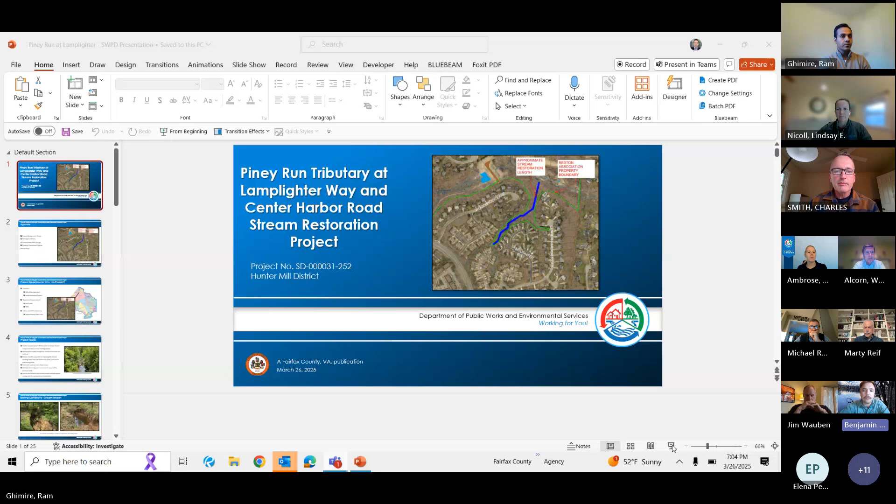Yeah, sure. Hey there, see a lot of familiar faces here from the neighborhood, but for anyone who doesn't know, I'm Ben Rhodes, I'm the watershed manager with Reston Association, and have been trying to help liaise between this project, Fairfax County, and our members here, to make sure Reston Association's interests are met by this project. This stretch of stream was brought to the county by Reston Association years back due to the severe erosion issue and exposed sewer lines.

So appreciate Fairfax County leading here on Reston Association property to do this project. And I'm Mike Reynolds, and I work and support Ben, and we just really want to support all of our residents here in Reston as well as this project. So thank you for having us, Charles.

Yeah, and it's just a quick note that clearly Reston is our close partner. It's on Reston Association property by and large, and we will work very closely with Reston to coordinate impacts to the community, as well as Supervisor Alcorn and his staff. Mark Goldberg-Foss is on tonight from Supervisor Alcorn's staff, who will also be our close contact throughout the process.

And then the other folks I'll introduce and let Ram take over. Heather Ambrose is with us this evening, she's a branch chief in the Stormwater Planning Division. And Lindsay Nicoll, who is the lead engineer for this project, designing for McCormick Taylor. So with that, let me turn it over to Ram Ghimire, who is our project manager.

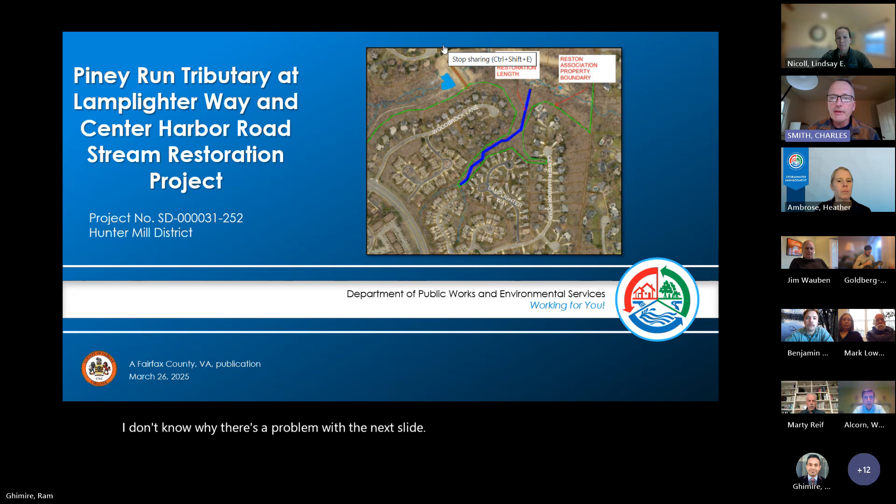Is there any problem? I don't know why there's a problem with the next one. Ram, if you want, I can take over and run it from a PDF. That might be easier, let me give that a shot. All right, I'll do that. Yep, please, I don't know. All right, can everybody see this?

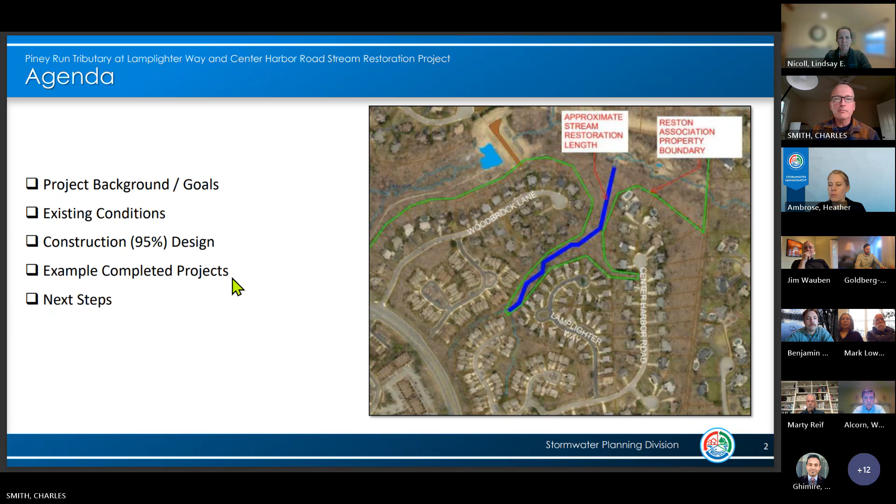All right, let's go, this is slide 2. Okay, thank you, Charles. For the meeting agenda today, we will touch on project background and goals, the existing conditions of the project. We've currently completed the 95% design construction documents and we're heading to final design. We'll show some examples of completed projects and the next steps for the Piney Run Tributary.

Okay, next one. As I mentioned earlier, the location of the project will be in the Difficult Run watershed, and it will be on the Reston Association property. For the regulatory requirements, we have the MS4 permit and TMDL requirements we have to meet, and the project has safety and utility concerns because of sanitary sewer line exposure in 2 locations. So the project is really important, that's why we were brought in and have been discussing this in the past.

We can see the project location here. The green line is the Reston Association property boundary, and the blue line here is the project scope that we're working on.

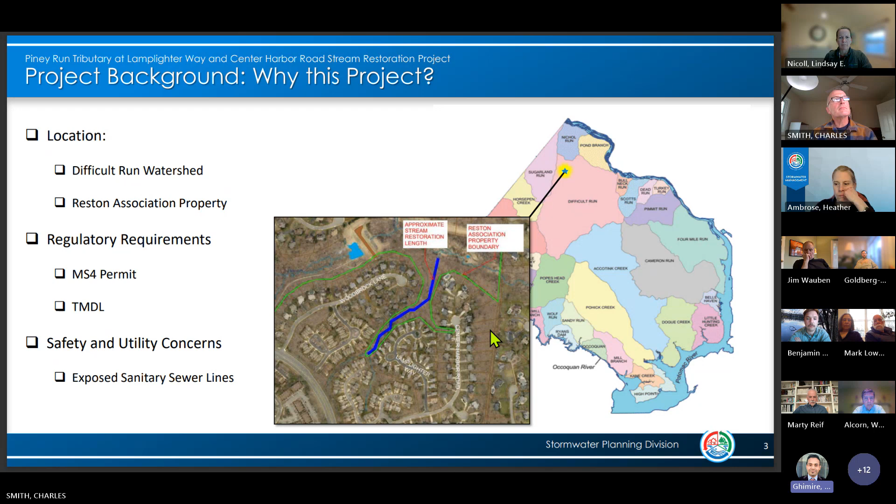The project goals: the project will restabilize approximately 1,500 linear feet of stream channel, preventing future erosion and degradation of the channel. It will improve water quality through the removal of nutrients like phosphorus and nitrogen, and a lot of sediment through the stream.

Restore a healthy ecosystem by improving the channel. We'll be installing native trees and herbaceous plants, and we'll be doing invasive plant management as part of the scope of the project.

To protect the sanitary sewer infrastructure, to protect the county assets and infrastructures, the exposed sanitary lines, and to minimize community and environmental impact of the proposed work. We're trying our best to save trees and protect environmental factors, especially sediments and erosion and degradation of the area, so that will help in the long term. We'll be trying our best to minimize the community and environmental impacts of the project as far as possible.

And we'll continue to maintain open communication with the community members during the design as well as during construction of the project.

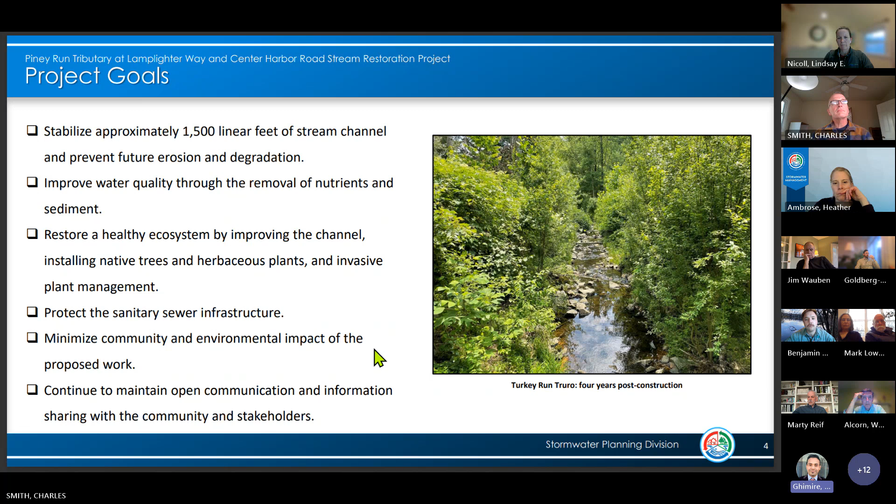Existing conditions of the stream at Piney Run. The banks are susceptible to continued degradation and failing slopes. We can see 4 or 5 foot deep channels and a lot of fallen trees in the area.

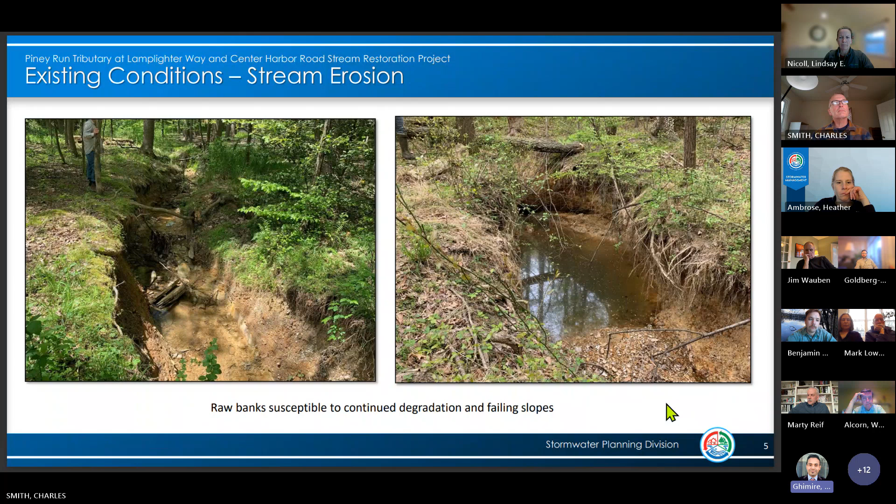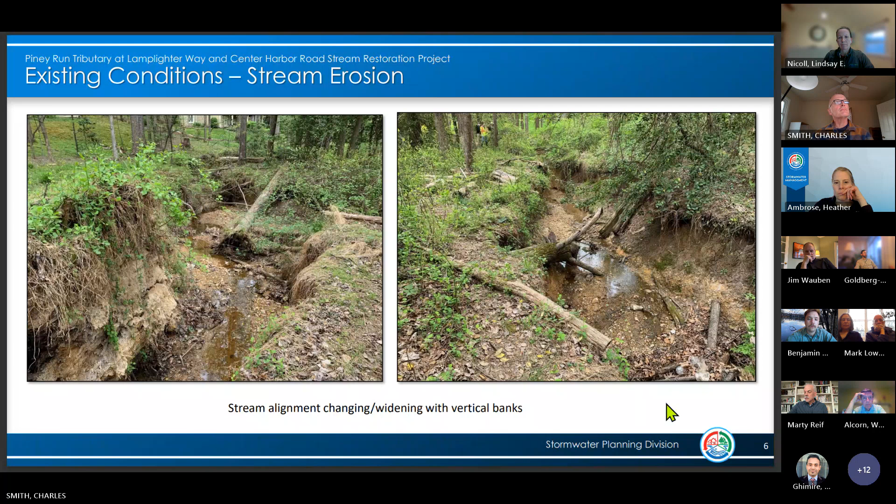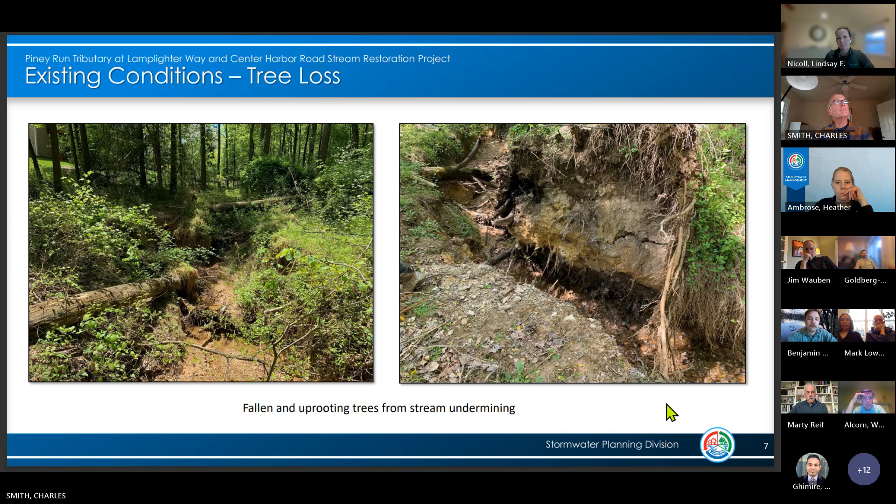Similar conditions here - a lot of stream alignment has been changing from here to there. Widening of the channels and vertical banks can be seen currently on the project site. A lot of fallen and uprooted trees from stream undermining, and we can see a lot of tree loss here.

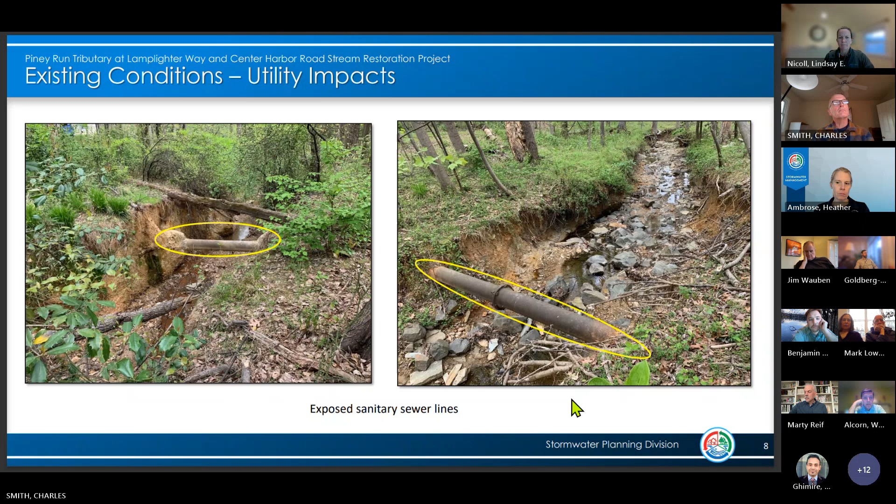Overall, just touching base on the history, how we designed it, and the current status.

We completed pre-design assessments and survey, and developed the concept plan at 35%, which was shared with all community members and stakeholders. Then we went into easement acquisition of the project. Then we reviewed the preliminary 65% design plan. The current plan, after the 95% design, is pretty much close to 65%. A lot of changes were adapted from 35% to 65%, but pretty similar from 65% to 95%.

So we are in the final design phase here, working on permitting and utility coordination. And this is the overall plan for the project.

This is the construction entrance to the Pink Trail. We have a small staging area here, and we'll use the access road through the Pink Trail. We're trying to minimize the disturbed area around the neighborhood as much as possible, so we're getting close to the stream and using a little bit of staging area available here, here, and here. This will be the main access for the project, and this is the main stream we'll be working on restoring.

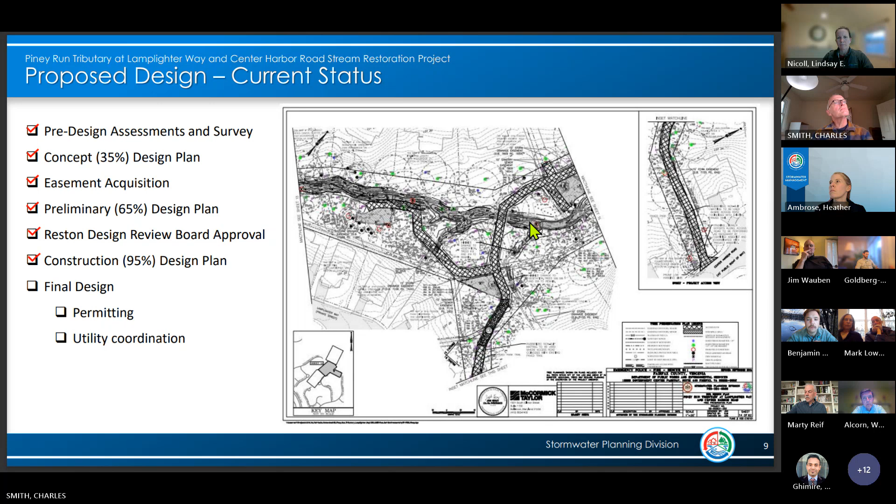Here are some examples of pictures so we can get a clear picture of what we're heading into. Regenerative cascade pool complex - we'll be using a lot of wood and stone structures and natural channel design techniques to stabilize the stream sections. This is a riffle grade control where we'll create a very smooth transition of the grade for the flow, reducing the velocity and energy of the flow while still managing the flow within the stream channels.

We can see the toe boulder protection for the slopes, protecting slopes and managing stream velocity, the cascade structure, and outfall stabilization. We'll be using riprap class 2, especially when we get flow from the outfall. These are the different structures we'll be proposing for this project.

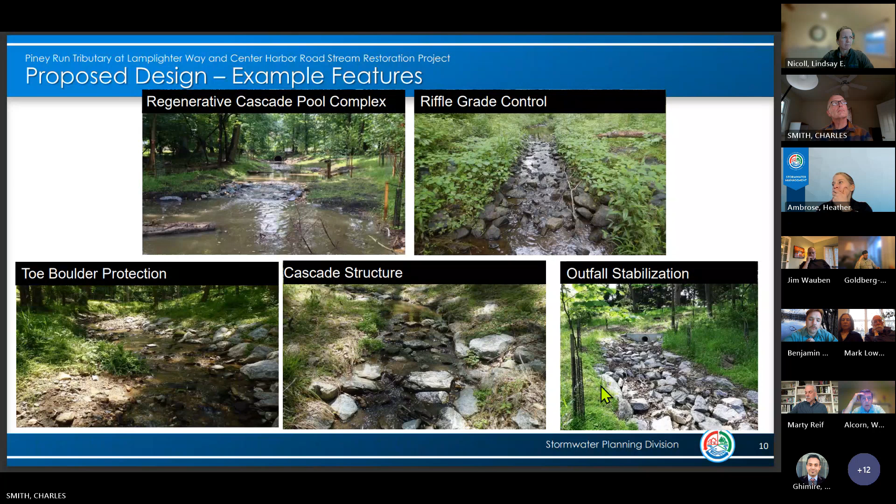So here's a little bit of comparison from concept plan, 35% design plan, and construction 95% design plan, which is the current status.

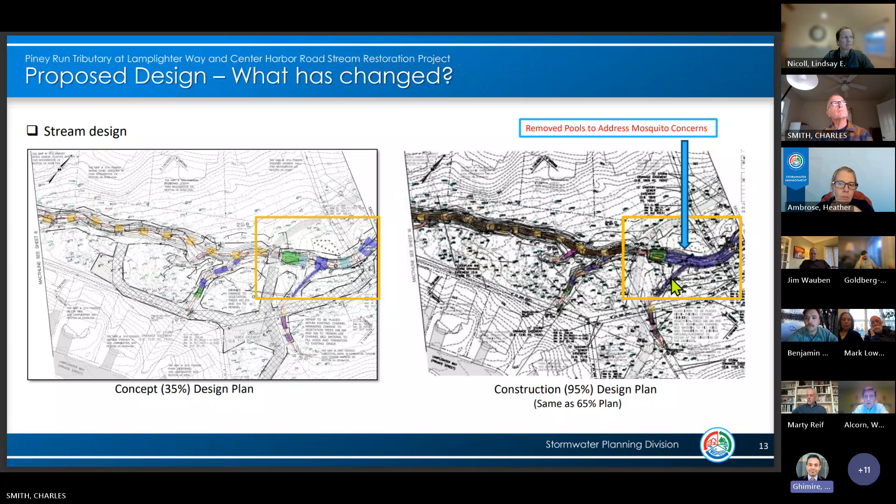To save a lot of trees in the downstream near the end of the project, we've shortened the project a little bit. The preliminary plan was to go up to this utility line, but the project has been shortened. We'll be ending the project here now, so hopefully we're saving a lot of trees while still maintaining the streams and all the project's overall goals.

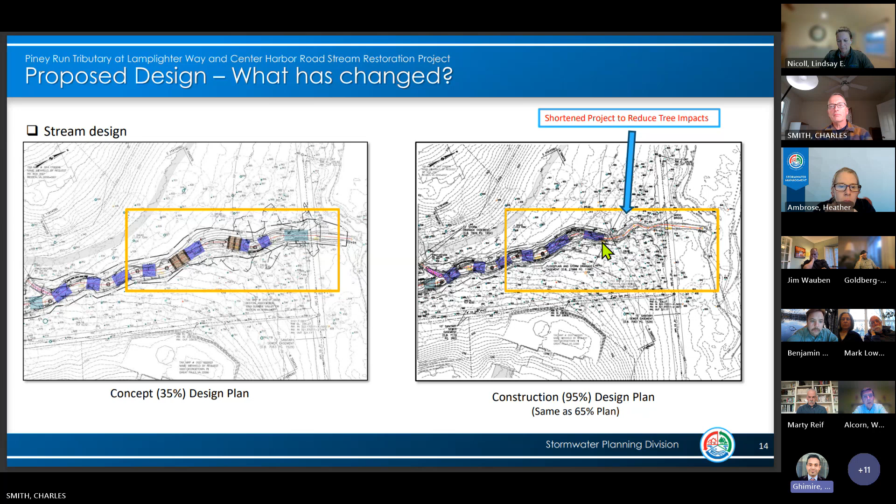Floodplain modeling: McCormick Taylor has run modeling for 100-year and 500-year floodplain analysis to see where our floodplain lies and if that will be a problem for the neighbors.

From their modeling analysis, it doesn't impact the neighbors and the other properties, and all the flood and stream flow will be bounded within the designed stream section here. So just to confirm, we've verified that even the 500-year flood remains within the Reston Association property here.

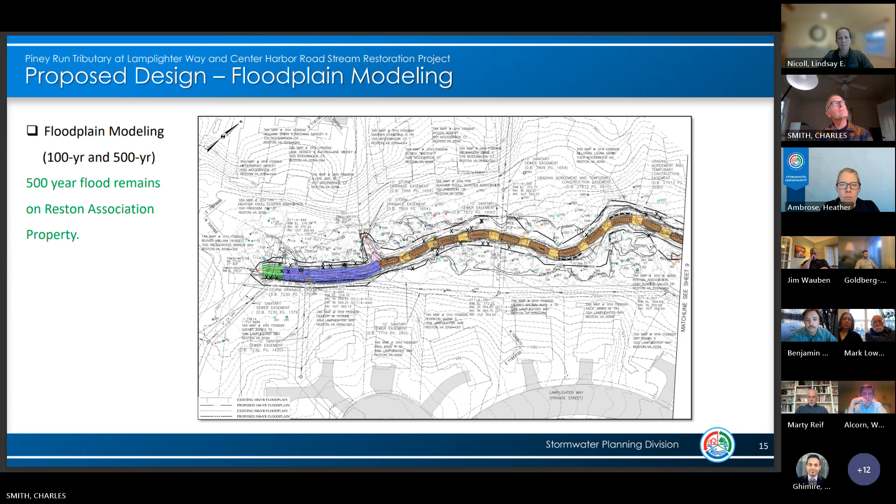This is the same map. We can see the floodplain through here, and we can see that it's bounded within the Reston Association property.

Another component of the restoration is planting. In recent times, the county has proposed a lot of super clump plantings that have been very successful in our recent projects.

So in this project also, we're proposing super clump plantings in these three areas from the end of the project around here, and near the access and staging area by the pink trail. Using super clumps in addition to dispersed plantings is to improve forest vegetation across the project.

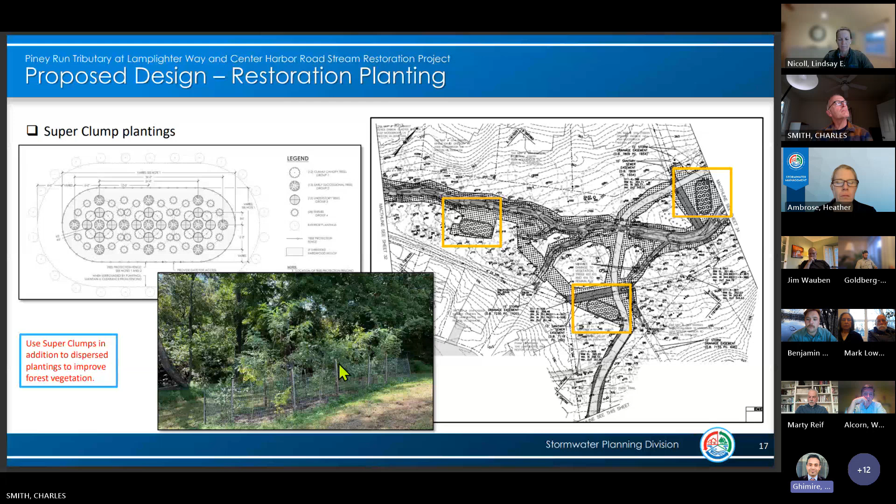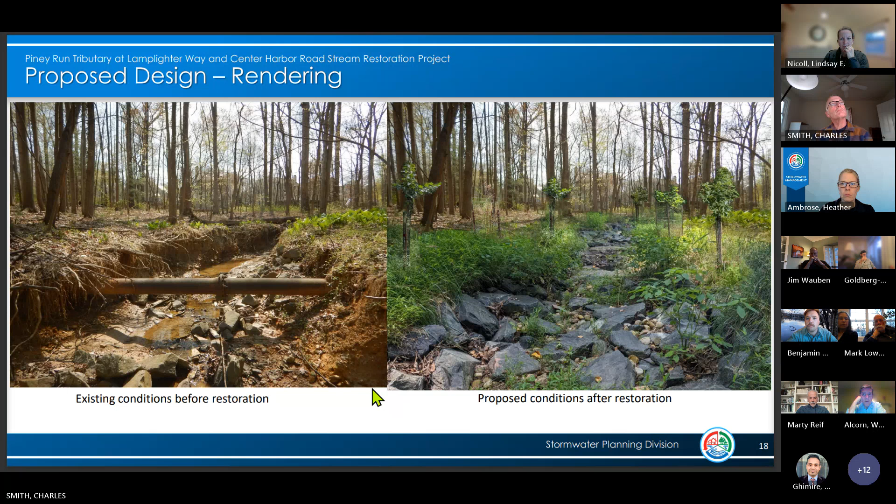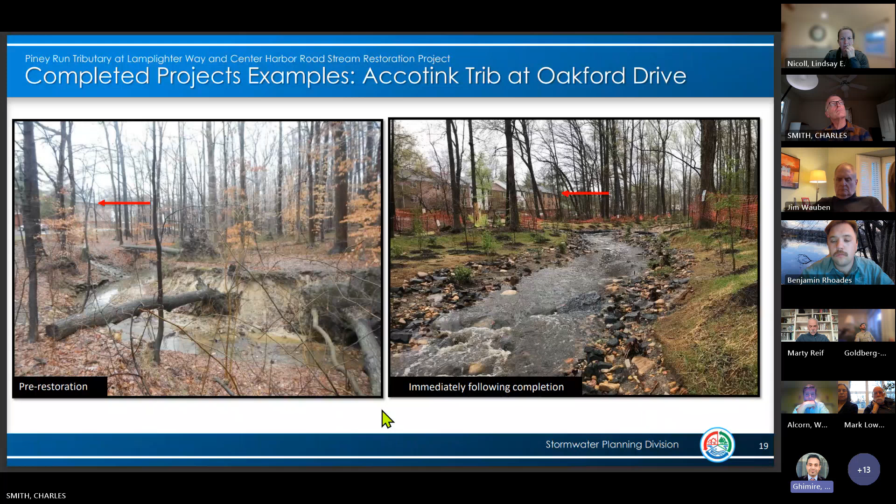This is a project example from Accotink Tributary at Oakford Drive. This was the initial condition pre-restoration, and immediately following completion, the area and the stream look like this, with a very stable area and streamlined flow.

This is a photo from the same project after two years of project completion — a lot of vegetation and a stabilized area in the stream.

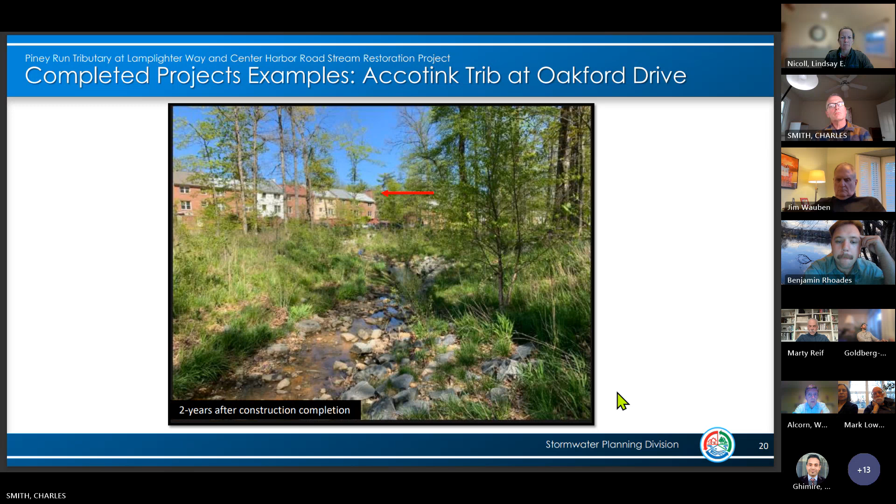This is another example from the Turkey Run at Truro project. You can see and compare the conditions before restoration and two years after restoration.

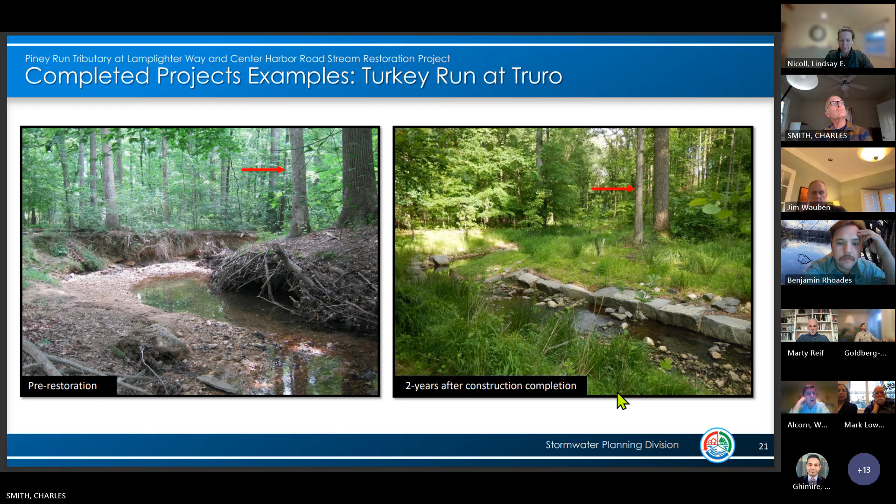This is a similar example where we're using a lot of log sills here to control the grade and velocity of water running through the stream. This is a very eroded and unstabilized channel — that's what we're moving from this phase to this phase.

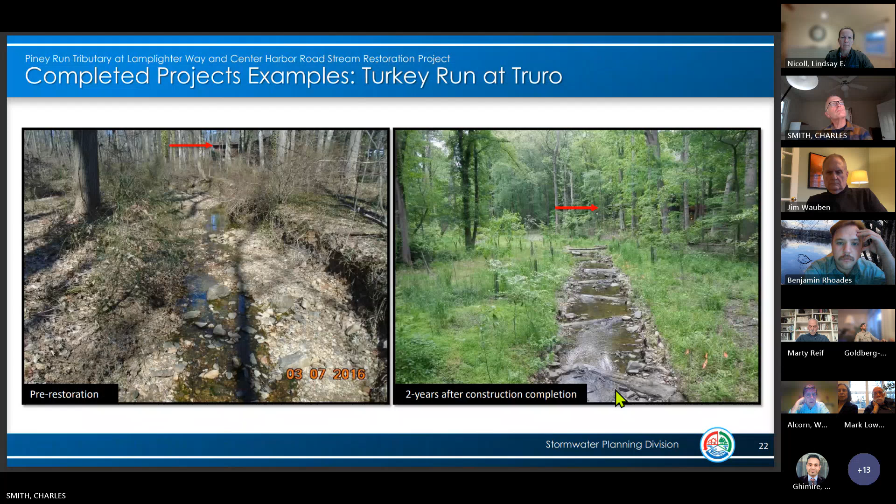Okay, path forward and next steps. Design: we completed the pre-design survey assessment in January 2020. The concept, or 35% design plan, was completed in January 2022. The 65% design plan was completed in January 2024. Construction, 95% design plan, was reviewed in winter of 2024.

Now we're in the phase of final design, approval, and permitting in spring of 2025 that we're working on. The construction authorization will be heading in that direction probably in the next few weeks. Construction award and start we're expecting summer to fall of 2025. Construction duration overall is tentatively estimated at about a year.

Then our post-construction monitoring will start after. It's multiple years, but the warranty for all construction items will be for one year, and after that we'll be monitoring the whole project in the long run.

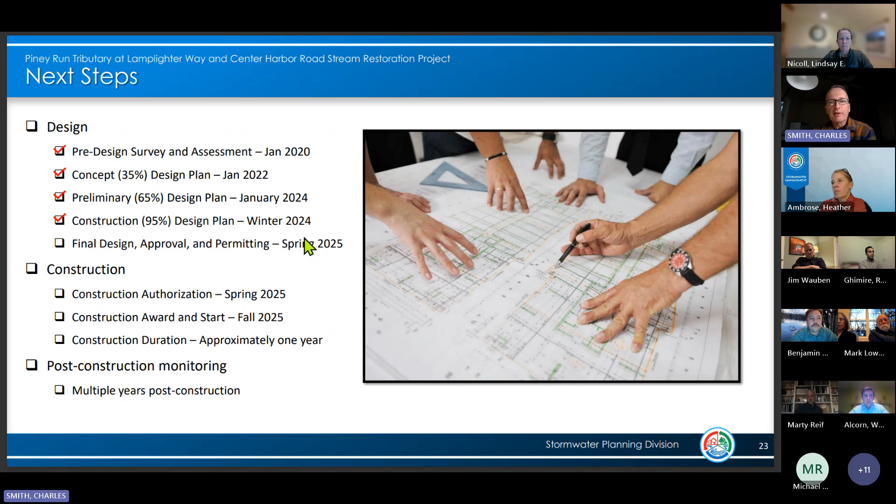This is pretty much the comparison. The image on the right is the current plan. On the bottom, you're coming down the Pink Trail, and right where the sewer line crosses, it's very open on the left. We're taking advantage of that open area adjacent to the sewer line for a first staging area.

If you look a little to the left of that, the access goes into the stream. There's a fairly clear area there that we'll use as a smaller staging area for materials while we're working upstream, largely within the channel.

The third one is downstream of the Pink Trail. You cross over at the culvert where it currently is, and again where the sewer line crosses, there's an area level above the creek where we can put materials while working and accessing the channel downstream. So we're fairly concentrated on these staging areas, with access centered around the Pink Trail to most of these sites, and using the stream channel itself up and downstream.

So what about damage or die-off of trees on private property? We have a limited number of locations where private property will be impacted. We'll work with those owners, but we don't have many places where we're touching trees on private parcels. They're primarily trees on Reston Association land, but we'll work with individuals if there are concerns.

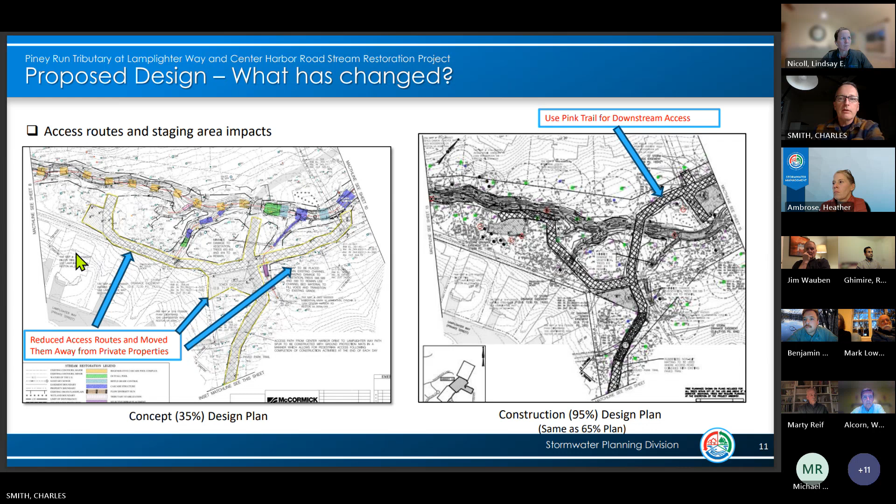Get a copy of the 95% or final design documents. The answer is yes, Marty. We can put a copy of the 95% out, but we should be in the final soon. Lindsay, when are you guys getting us the final? Within a couple weeks or so. When we have the final, we can put it on a share file, it's called Ignite, and send the link for download to the email list. Anybody who gets the email can download the file and share it with anybody else, who can also download it. Will that suffice, giving you the 100%? Yeah, that works for me. Okay, great.

All right, other questions? Just one more question. Are there going to be technical specifications that go along with the design plans, or is it all on the drawing?

No, that's a good question, Marty. We do have a spec book, and we can put a copy of it on the file also. What you'll see is probably 80 to 85% of the spec book is boilerplate, Ron correct me if I'm wrong, you'll see it almost every Fairfax County construction contract. We have about three unique sections that occur with stream restorations included in that, mostly addressing planting, invasive control, and any special conditions for this particular project. But we can definitely upload the spec book too.